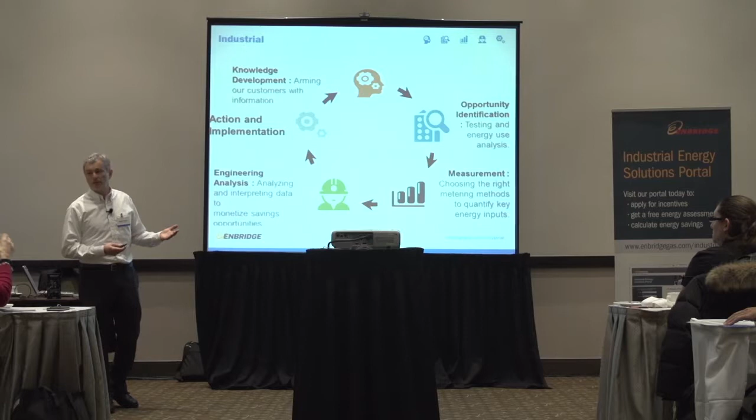So when you go and ask for funding from your facilities for some energy efficiency measure, we are sure that we gave you all the information to be as accurate and realistic as possible. Because we all know that if you go and ask for $100,000 and you tell somebody they're going to get back $100,000, getting back $99,000 is not good enough. Right? So we're trying to really cover you for that.

We speak from experience as well. Again, we saved huge amounts of energy so far for our customers. 110 million cubic meters of natural gas, 20 million kilowatt hours of electricity, 800,000 cubic meters of water in a 3-year period alone. So this is a significant amount of energy. And of course, for the customers, you get not only cost reduction, you get reduced CO2 emissions, and you improve your bottom line. So we feel that this program is a win-win for everybody.

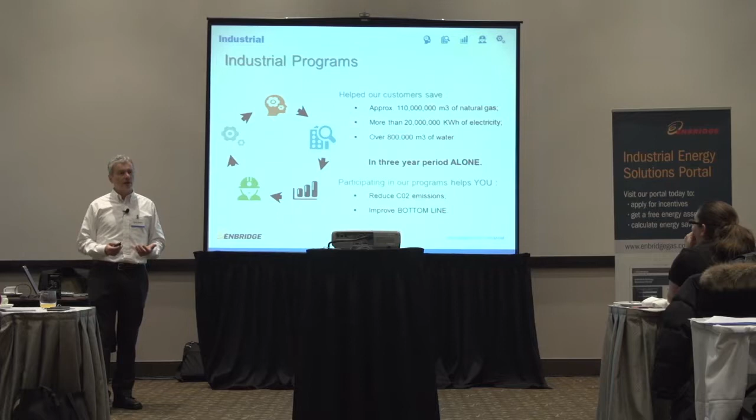Okay, so after this brief commercial, question: why manage energy in the first place? It's all nice to have energy management, but why would you do that? What are the benefits, right? So everybody thinks the benefit of energy management is directly energy benefits. Lower energy consumption, reduced emissions. Knowing when energy is used helps you. If you do contracting for energy, you know how much you have to buy. Your profile of usage helps you get better pricing.

You can make better capital investment decisions. Do you really need a new oven, or can you do with the oven that you have? Do you need a new boiler? And of course, accurately allocate costs. I had a couple of customers who are selling the energy to each other. Accurately accounting for that cost is crucial. So those are all benefits of managing energy that are energy specific. Right? But there are also non-energy benefits that very few people connect.

So operational improvements, set points. Many people have heat exchangers, huge heat exchangers. I had a customer who had a heat exchanger, and when it went down, it cost them $250,000 to clean it. So they wanted to be absolutely sure that that cleaning is necessary at that time. Not before, not after. So getting energy management in place that actually told them how much energy is being recovered in that heat exchanger solved that problem for them.

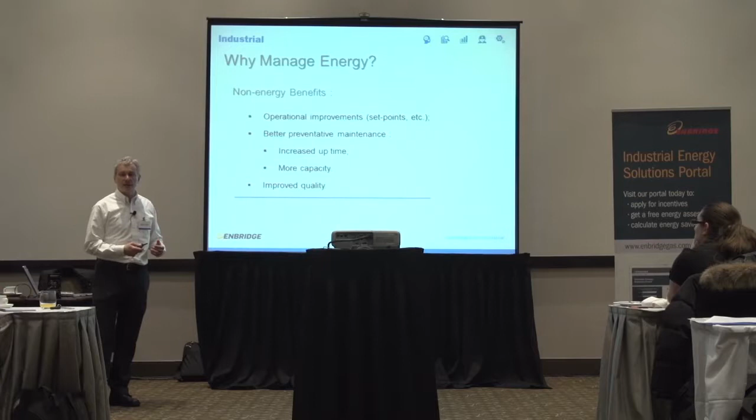Better preventative maintenance, increased uptime, and more capacity. Of course, if you don't have to do unscheduled downtime, you will create more capacity for yourself with the existing capital equipment. Of course, improved quality as a result of better uptime, more capacity. You have more time to focus on the things that matter. It will result in the improved quality.

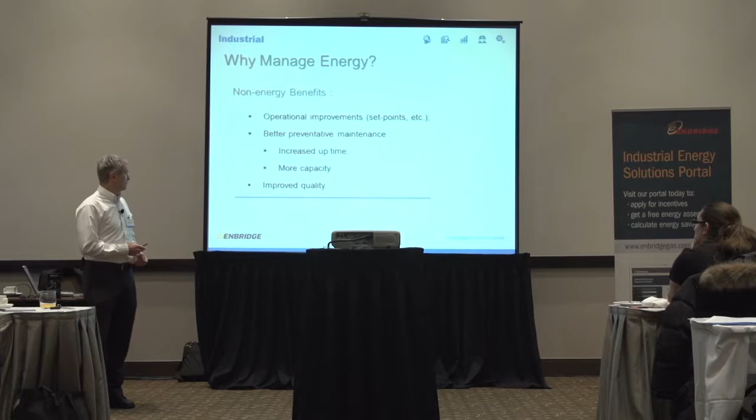Again, result of the energy management. All of it leading to tighter cost control. Because we understand that even though we talk energy, you guys are measured on your costs, on the quality and cost of your output. So all of that actually serves tighter cost control.

So if a good energy management conserves energy, reduces emissions, and saves money everywhere in the organization, then the supporting energy management structure, the processes in place, should provide means to control how the energy is consumed. It should be embedded into every aspect of the organization. It makes energy visible. This is a very big topic for us.

I'm very passionate personally about this, making energy visible, because I feel that if somebody sees every day what it costs them to run something, they will actually act on it. Energy is raw material. Energy can be affected. Energy can be managed. It is not a given that you have to pay a certain amount of dollars every single month. You can control that. That's a huge, huge point.

So how do we see this structure? We call it Comprehensive Energy Management Program, and the way we see it is we start with the senior management sponsorship. Again, huge step, because when we talk energy management and we want to put energy management into every aspect of the organization, we need senior management support to actually spread the word to everybody and to hold everybody accountable.

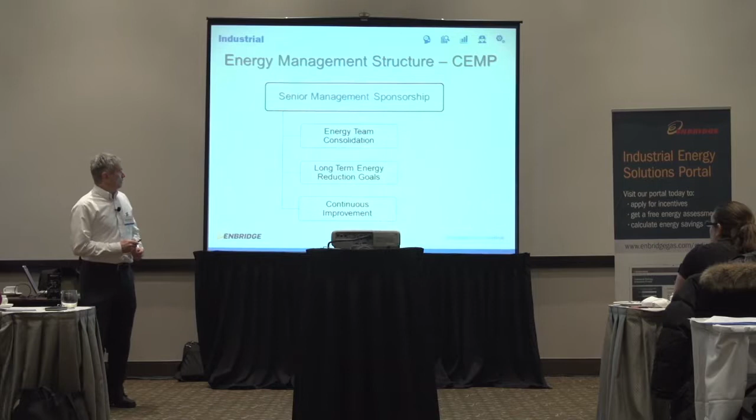So, importance of senior management sponsorship. I went to a few sites myself, and I know my ESCs deal with this all the time, and they say, well, I have great support from my VP of whatever the flavor of the month is. And it's like, I got my support, I can go and implement energy management.

We just had a case, very big customer, VP of engineering, huge, huge fan of energy management. They went about 80% into their energy management process. They had it almost implemented. The guy retired. Guess what happened to the energy management program since? It died. Right?

It's not only good enough to have one member of the senior management. You want to have as many as possible, because that will ensure sustainability. When that one person leaves or gets focus changed or whatever it is, you will have somebody else to back it. So this cannot be a pet project. This cannot be a project where just one guy or lady does it because they're just interested in energy management. This has to be embedded into the culture of the organization. And I know that's a huge task.

That's a given. So the reason why is because when the senior management gets together for their meetings and they talk about their kids and their hockey tournaments and all that stuff, they also touch on other subjects, such as corporate financials, corporate strategy, and the risks to the corporation. These are guys that are very busy. These are boardrooms that are full of ideas how to accomplish those three main goals.

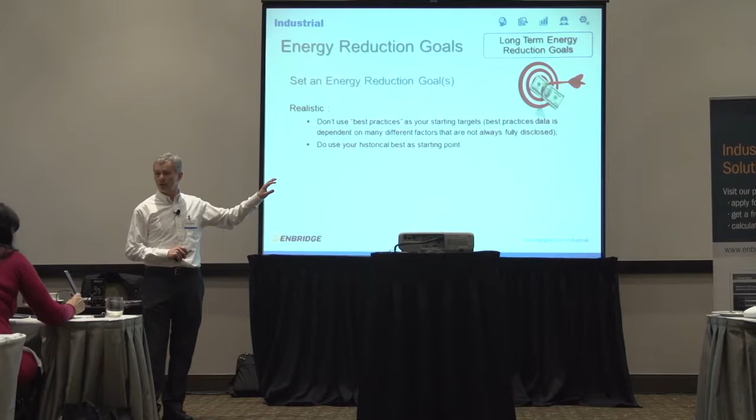So you want to know how those guys achieved best practices before you set best practices as your goal. So you can have it as an aspirational goal, but you cannot have it as your operational tactical goal day in, day out for the operations.

And they have to be time-bound. Again, yes, we want to reduce it by 10 gigajoules, but whether we want to reduce it by 10 gigajoules by the end of 2020, by the end of 2050, or by the end of this year, it's important. How much effort is going to go into it? Depends on how fast and how much you want to reduce.

Any questions or comments on this part so far? Excellent.

Next step, assessing the baseline. We talked about it as an energy audit part. What is our baseline, right? So somebody smarter than me said this, every journey starts with a single step, and it's very true. You have to start somewhere. No matter how complex your project, recall any one of your complex projects you participated in. You might have had 300 different steps on your MS Project chart, but it had to start at the beginning, at the first milestone. Same with this. You have to start somewhere.

So successful energy management implementations have always started with a fact-finding mission to define what is our base case, what is our as-is today case. Because if I would tell you, I want you to reduce something by 10 gigajoules, I have to know that you're already using about 90 gigajoules. Because if you're using 1 gigajoule, you will have a hell of a time getting 10 gigajoules out of the system. You need to understand where you're at.

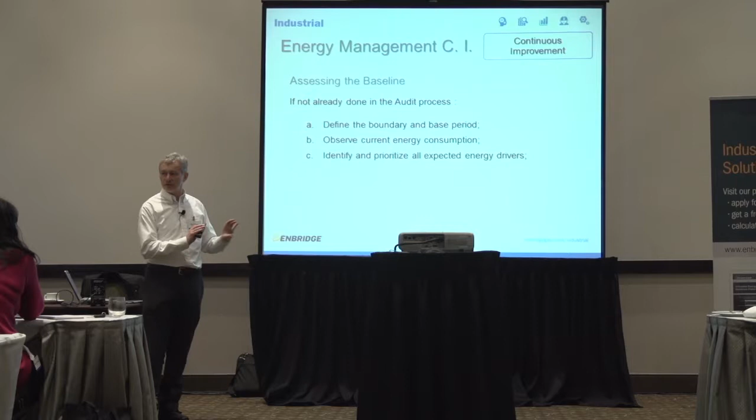So if you haven't had the facility audit process, now you have to do these steps again. Define the boundary. What are you going to use as your boundary? What are you going to use as your base period? Observe the current energy consumption and identify energy drivers. So whether you do it in a facility energy audit step or here, it's irrelevant, but it has to be done. In addition to that, when you're doing the baseline, now there's 2 extra steps. You have to now check if those expected energy drivers actually affect the energy. So you have to generate the baseline energy model, and then you have to check whether that model makes sense.

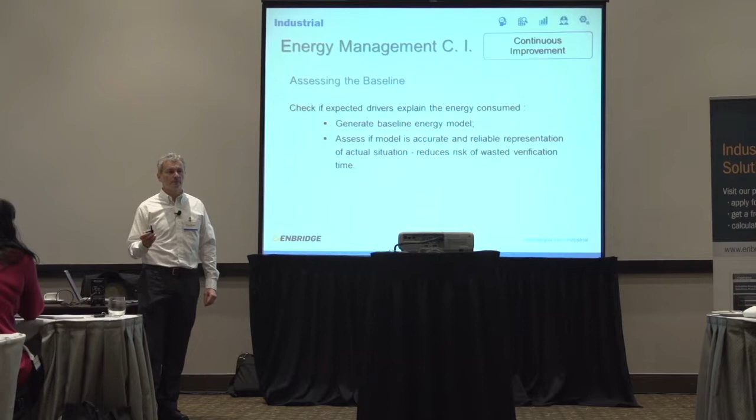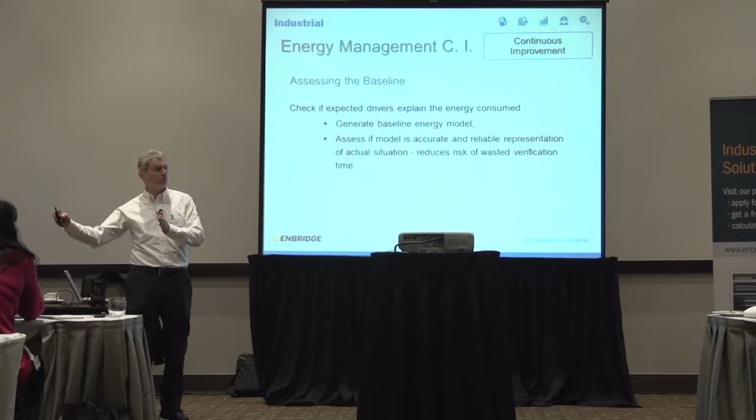And why is that? Because to develop a baseline, it takes a certain amount of time. Right? So you have to go either back into history to get the time, or you have to start now and wait 6 months until the baseline is done. At the end of that process, regardless how you look at it, you will use your baseline on a go-forward basis. So you don't want to be 6 months ahead and say, ooh, now these numbers don't make any sense anymore because I forgot something. So that's a very important step.

Accurate baseline is required. So this is where our ESCs, if you need some help, we're happy to help you. To be there to say, do these numbers make sense? Why do they make sense? Why do they not make sense? Again, free help.

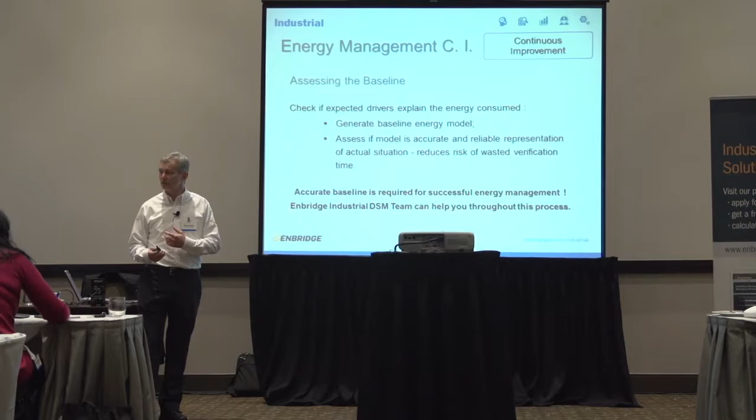So let's start with the defining of the boundary. First step, what are we going to do? Whole facility. If we have a relatively simple facility, then we can use a whole facility as our first step. You have meter data at the entrance of your facility, be it natural gas, electricity, whatever it is, and you have only maximum 1 or 2 energy drivers. So weather-dependent consumption, maybe one simple line that only makes one product in one particular fashion day in, day out. Then you can take whole facility and you won't go much wrong.

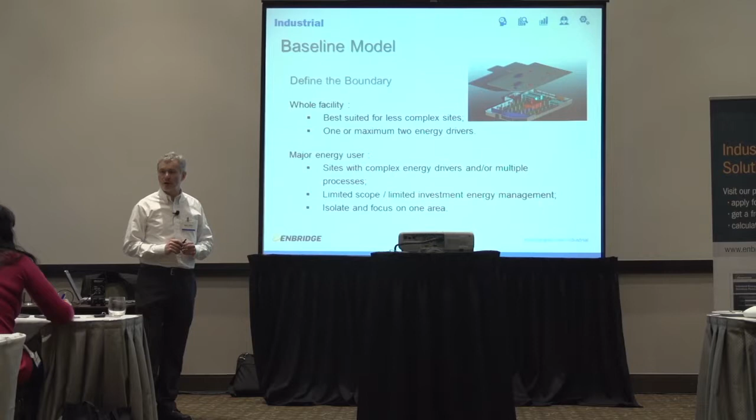But if you have complex sites, if you have multiple energy users all over the place, you want to look at the major energy users first. And then what I call limited scope and limited investment energy management. Start there. Identify something really important, draw a boundary around it, energy manage that part. It can be a boiler room, it can be a major paint line, it can be a major oven, whatever that is, start there.

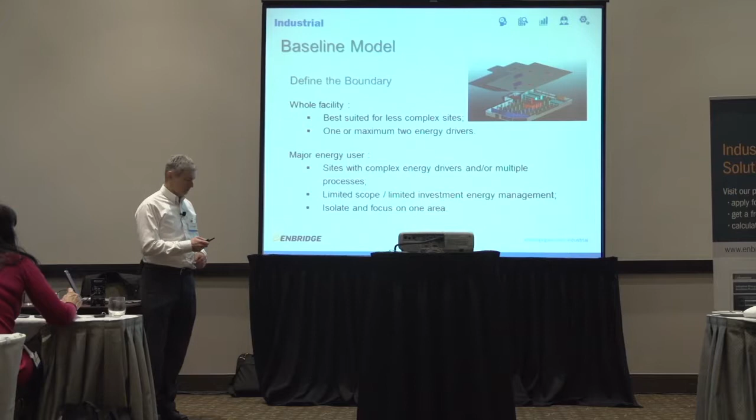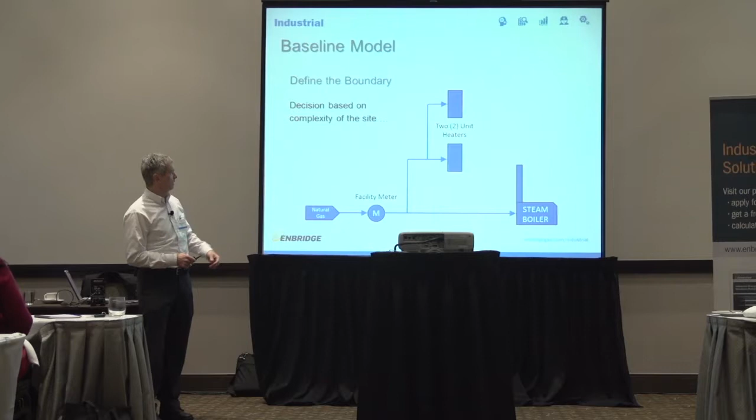So this is just an example, right? If you have a steam boiler that uses 90% of your consumption and you have little 2-unit heaters, you have a facility meter, you can probably get away with doing the energy analysis based on this meter, and you don't need a heck of a lot of other stuff. So that's a facility-wide candidate.

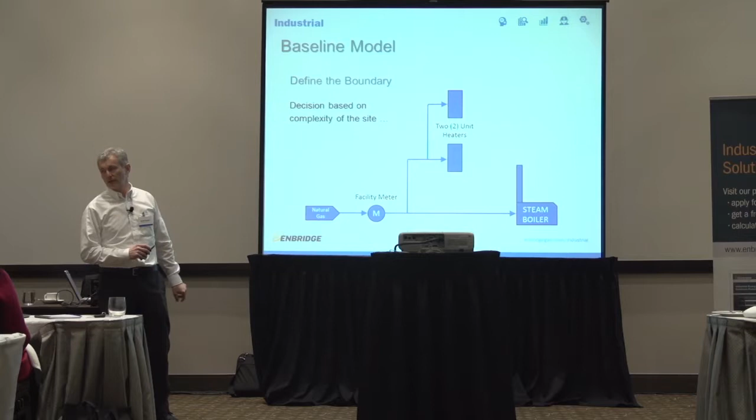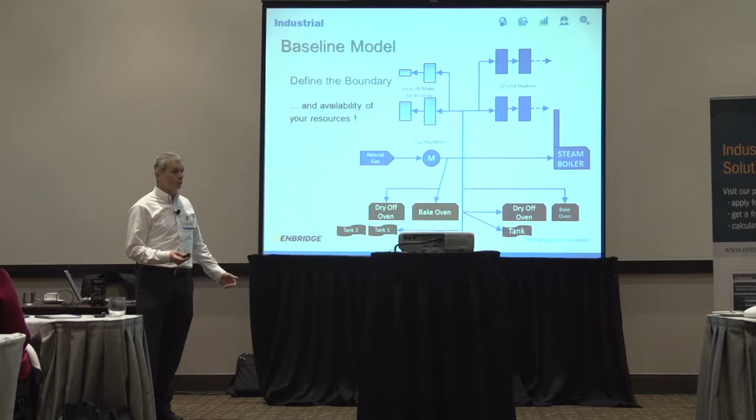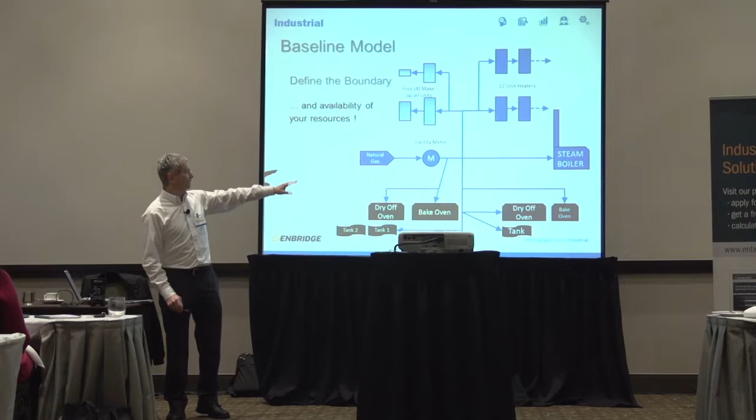But now if you have 22-unit heaters, 4 different size makeup air units, 2 paint lines that are completely different and they operate differently, now it's your decision. Do you have enough resources to handle all of that at once? Because regression on this meter will be a hell of a lot more complex than the last one. Or do you want to split it up and focus on, say, this line or the steam boiler or makeup air units to start with?

You have to make that decision early in the process. It will affect how much energy you spend. It will affect the results. I personally like to start small because then I can show some gains. Management starts to believe in our results, and then we can go on to more serious things.

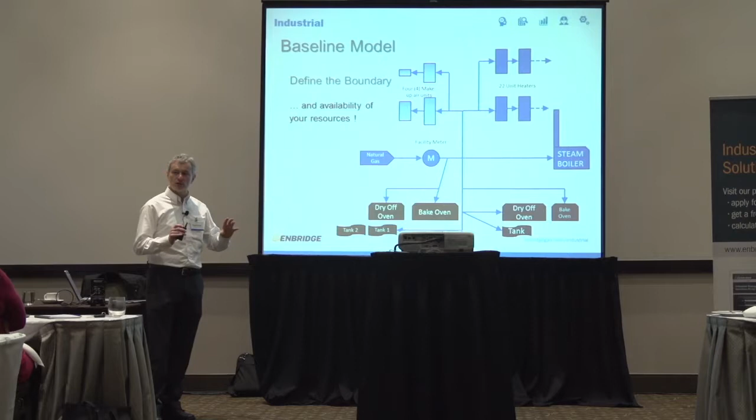But it's your decision to make. We will support you any which way you go. Once you define that boundary, now you have to go into base period. And I keep going about the base period. Why is it important? It can be weeks or months.

If your energy analysis shows that you're using pretty much the same amount of energy day in, day out, and your production levels are pretty much the same, you can probably do like 6 weeks worth of analysis and you will define your energy base case. You're good to go. But if your load is largely seasonal, then you will probably want to look at least 1 year worth of data to see the impact of the changes.

Because you want to go through the base period that encompasses the entire range of your energy drivers, maximums and minimums. For statistical analysis to be valid, you have to work with the data that encompasses the entire range. You cannot say, I'm going to only work from 10 degrees to 15 degrees Celsius for my base case, and I'm going to analyze minus 20 degrees Celsius weather. That has serious statistical implications. So you want to make sure that your energy driver encompasses a full range of extremes.

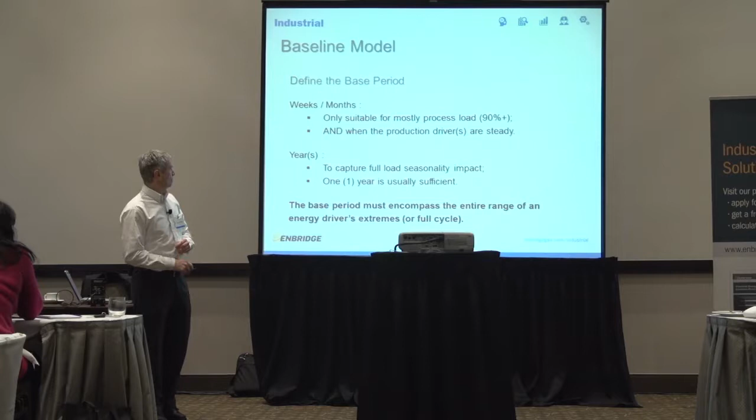Regardless how you get there, this point of data collection interval I cannot stress enough. Have all data sources report at the same interval. Most of you will say, who would do it differently? Again, speaking from experience, one customer had implemented a very expensive energy management system that reported the kilowatt hours in every 15-minute intervals. Of course, not in the full 15 minutes. It was something like 8 or 9 and then 15 minutes further and so forth.

Natural gas was reported at 8:05 and then every 15 minutes. Their production was reported in the shifts. It took us months of work to actually get data cleaned up enough to be useful. So don't do that. Get them at the same interval. And considering that you usually work in some sort of constrained space, what data you have available, monthly data is acceptable, but it's the minimum acceptable interval.

The closer the data, the more often the data collection happens, the better off you are. The more statistically valid the analysis becomes. Coarser data collection, of course, requires a longer baseline. So if all you have is monthly data, you will need a longer baseline. You cannot do statistical analysis on a sample of 3.

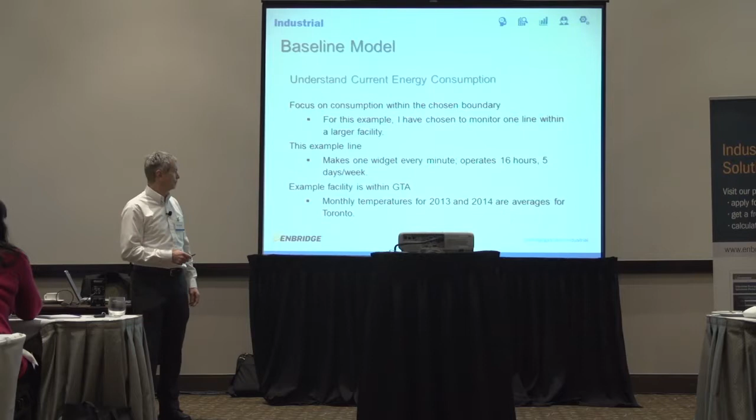But it's not very significant. You're still stuck with about 180,000 cubic meters per month of usage regardless of the weather. So that's typically your base load, your process load. And you can tell that the production is fairly flat because you make one widget every minute, 16 hours a day. There's not a heck of a lot of changes.

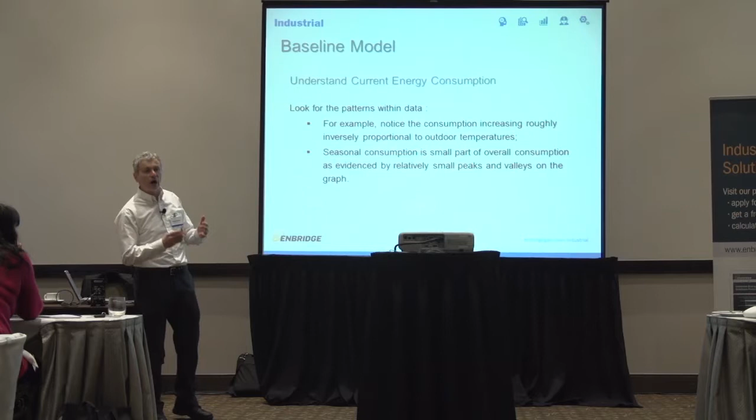And if I'm going to focus on anything in this energy management process, I'm going to focus on my process load. Because yes, I can save some on the seasonal load, but it's not going to be significant. So I'm going to focus on the process load. So that's how you should look at the data. Right? And then we have just a summary of that, how you look at the data. Look whether you have seasonality, how much base load you have, do you have the production steady or does the production change? All of that plays an effect.

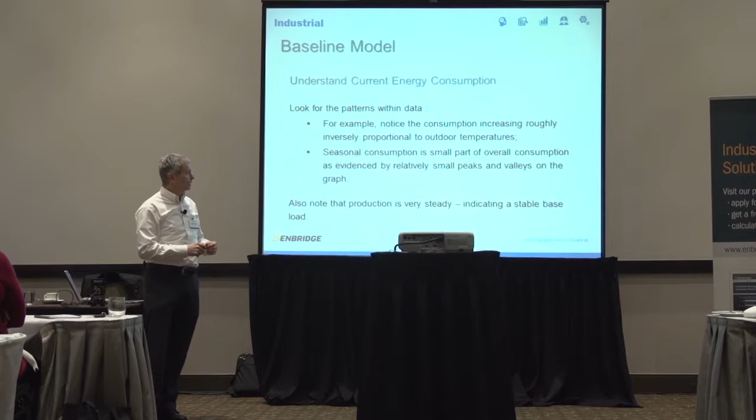Second, so now that we know what our energy looks like, we understand what influences it roughly, let's really identify these energy drivers. So we already have the two. Outdoor weather, we said, it changes a little bit. Production load changes it significantly. So what are the other ones? Now it's time to go back to the Kaizen principles. For those of you who have been part of it and in manufacturing, walk the process.

Go down on the shop floor and say, on this process, for this particular line, I'm going to walk down there, I'm going to talk to the process operators, I'm going to talk to the engineers who designed the process. I'm going to say, what affects this process's energy consumption? What is it that the person on the shop floor actually changes? And when they change that, how does that reflect in our energy consumption? That's how you find the energy drivers.

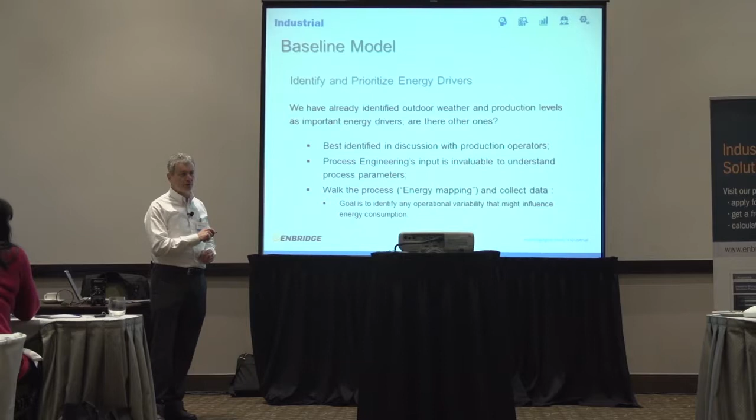Some people refer to energy mapping. There's gazillions of different names for this. But you essentially walk the process and collect the data on how the energy is being used and controlled. Goal of it, identify any and all operation variability that affects the energy use. Any and all of it.

So we have the data, we have the consumption, now we know what the energy drivers are, now we have to connect the two. We have to say, these are the energy drivers, this is the energy, how are they connected? And we use a mathematical model for that. So essentially we take weather, production, any other drivers that we found, we put it in the big black box, out comes predicted energy consumption, everybody's happy forever and ever. That's the basic steps.

In this particular case, we use something called a regression model. Most of you are familiar with it. But it answers the basic question, what's the relationship between the variables? And the way it does that, it relates one numerical dependent variable, which is usually called the Y variable, or what it is that we're trying to predict, and one or more numerical or categorical independent variables. Those are usually X variables. And those are the ones that we say explain or influence our Y variable.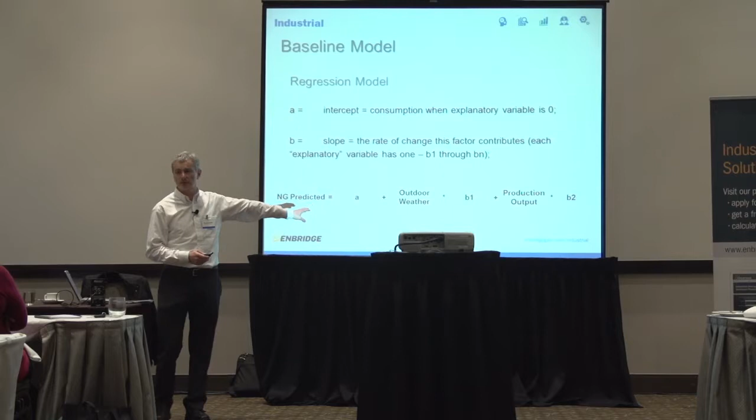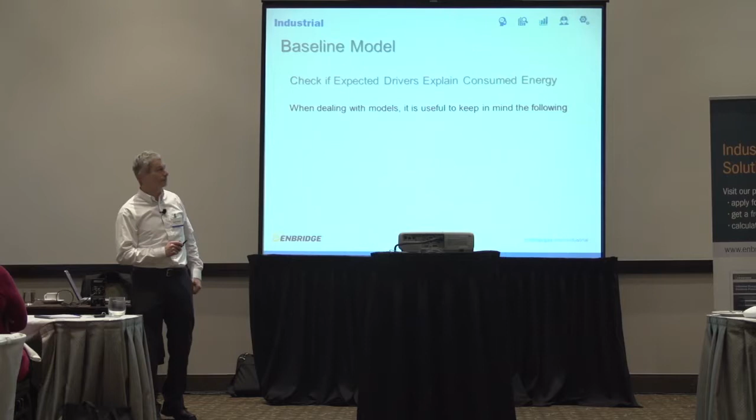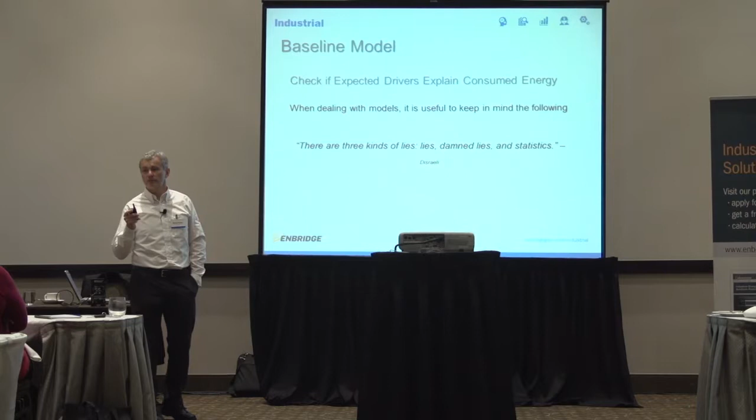But before we actually use the model, we have to remember some basic things about the models. Again, somebody smarter than me said this. Don't always trust the statistics without actually using a sanity check, because you will be wrong. Statistics is no better than the computer program. Garbage in, garbage out. Quality information in, pretty good information out. So we have to be very careful of that. There is no substitute for common sense. There is no mathematical formula that will save us from using our common sense.

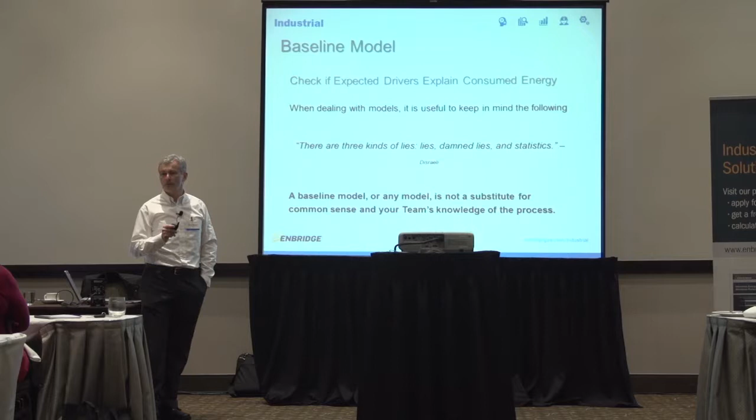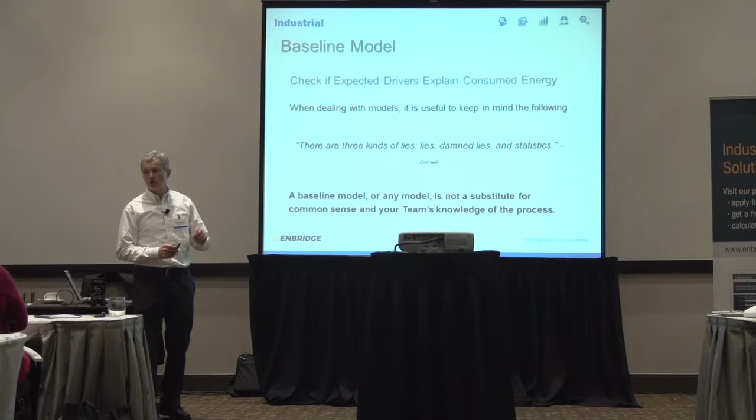So when you get a formula out of any sort of system you use, look at it and say, does that make sense? So if you see, for example, the formula for the outdoor weather, and if your consumption indicates increased consumption with the higher temperatures, chances are your model is not good. Unless you have really good reason why that would happen, the model is not right. So don't trust the model blindly.

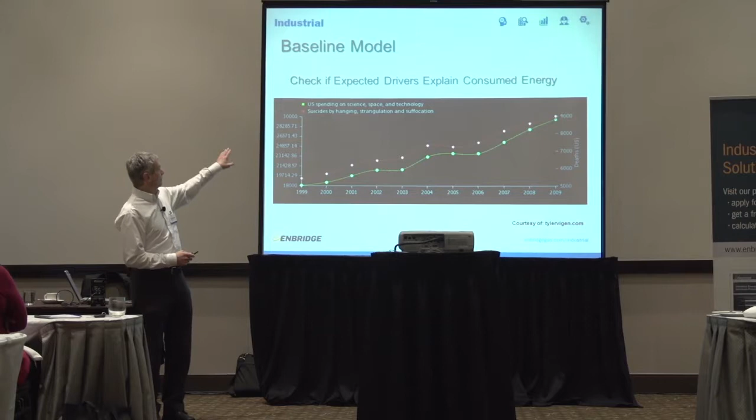I got that from the internet. You can go on tylervigen.com. The guy actually has a bunch of these examples. US spending on science, space, and technology in green versus suicides by hanging, strangulation, and suffocation in red. What do they have in common? Nothing. Correlation is 0.992. Your R squared will be 0.99. It's a perfect model. Meaningless, but perfect. Common sense.

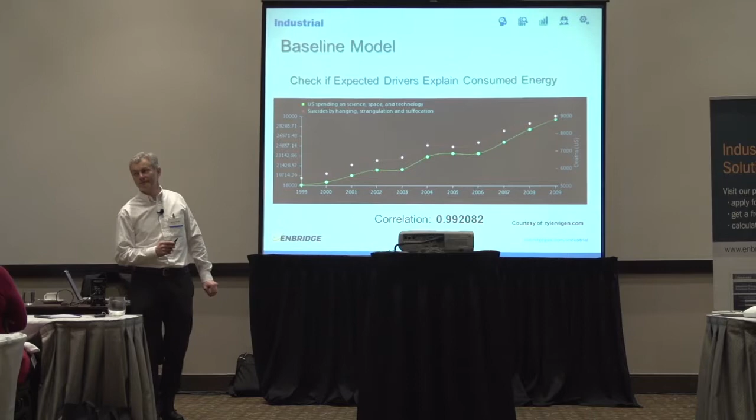So, bad news, good news here, of course. Bad news is you and your team are the only ones, the best judges, to judge if the model is right or wrong. No consultant, no ESC, not any one of us from the outside knows the process as well as you do. So use your knowledge. Check that. We can help you with the model building, we can help you with the data collection, we can help you with lots of things. But you have to look at the model and say, no, that makes no sense at all. And then we go back and redo it.

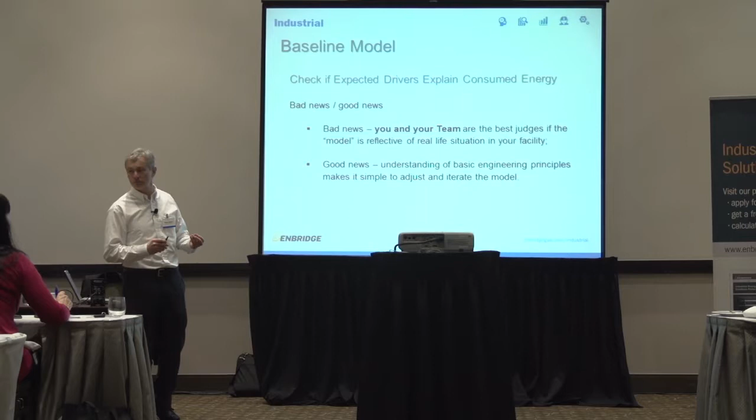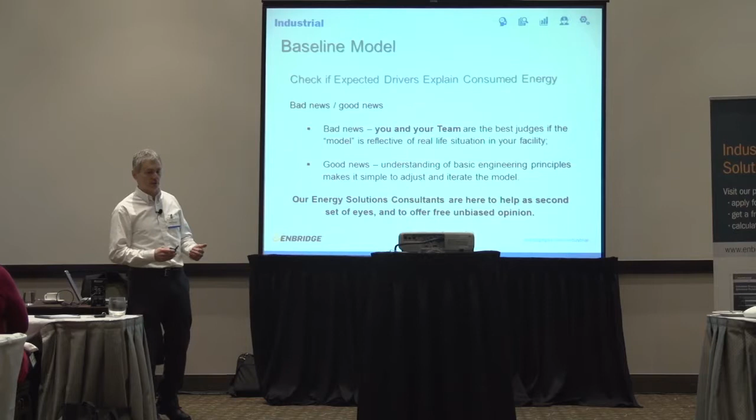Right? Good news is that understanding of these basic engineering principles solves all your problems. It's very simple to adjust and iterate the model once you know that the model could be wrong and once you know what affects it. So it's still within your control. All of you are more than capable to find that. So don't be afraid of the models, but use them to your advantage. We are here as well. If you need a second set of eyes, if you need to bounce ideas off of, if you say, have you ever seen anything like that? We're here to help. Ultimately, it is you who knows your process the best.

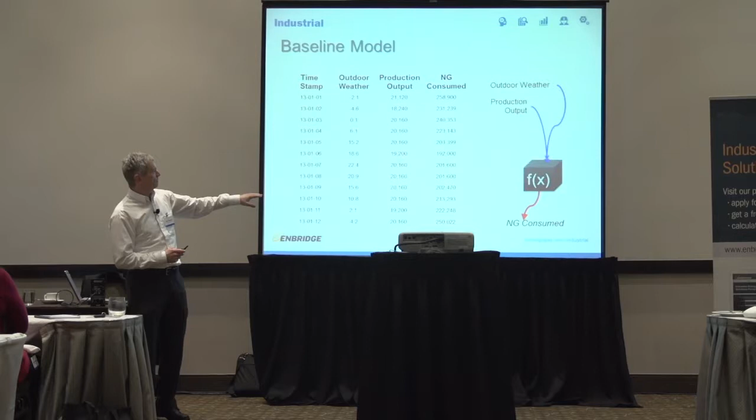So going back to our examples, we put that nice little formula in. We got our linear regression. We have consumed natural gas, and we're going to put it into the model, knowing the limitations of the model. How do we do that? Lots of people think this is some very complex software, very complex science. You can make it complex. There are very nice packages out there on the marketplace, very complex. They range from $10,000 to $270,000 that I worked with, and I'm sure that the range is higher for others. But you can start with as simple as the Excel tool. It's built into your Excel.

It's called the Data Analysis ToolPak. I'm going to quickly show you how it's done, and then George will show you a live demo on the laptop, and Slobodanka there has a laptop as well. So if you feel like you want to ask more questions, we'll have about a 10-minute break after this. You can take a look at the demo, you can ask questions, and then we'll reassemble and go forward, okay?

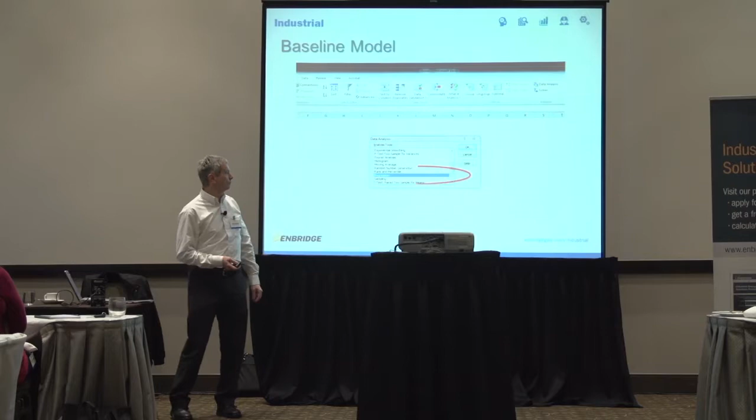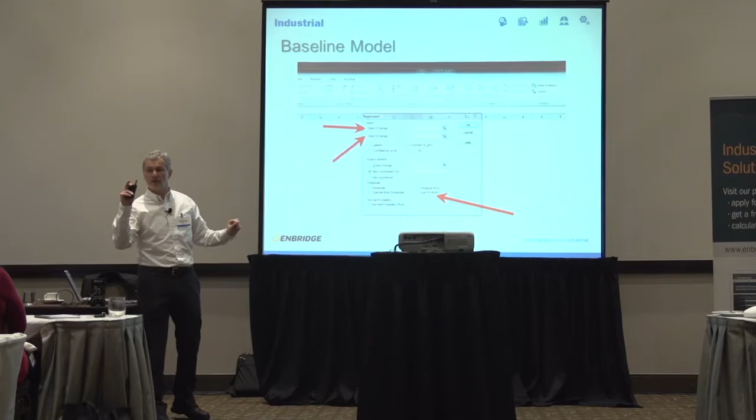So to start with, you find the Data tab on your Excel tool. You press the Data Analysis button over there. There's a pop-up that says Data Analysis. You scroll down, you find the Regression tool, and you click OK. Then this comes up. Input Y range, input X range. Y range is your natural gas consumption. Your X range is all the other variables. You want to make sure you have line fit plots, so it gives you a nice little graph showing you how your regression fits the data. And you press the button. That's it.

For the start, you can use your simple Excel tool. So your energy team, they meet together, they assess all the information they have, they put it into the simple Excel tool, they do a presentation like this for themselves and say, does this make sense or not? That's as simple as the start of your energy management journey.

George, please take over. We'll just switch the laptops here for a second. After this, there will be a 10-minute break.

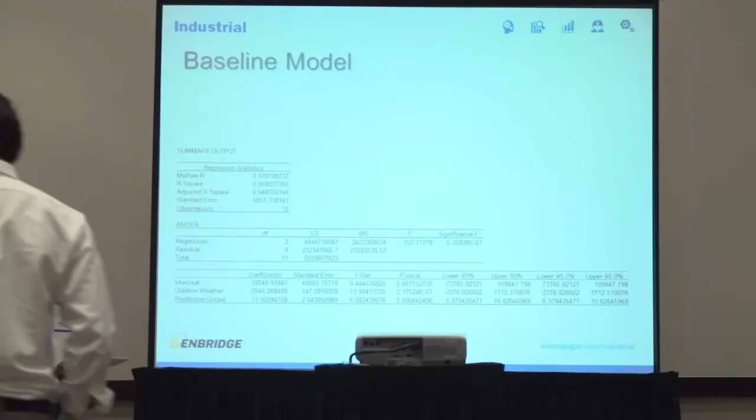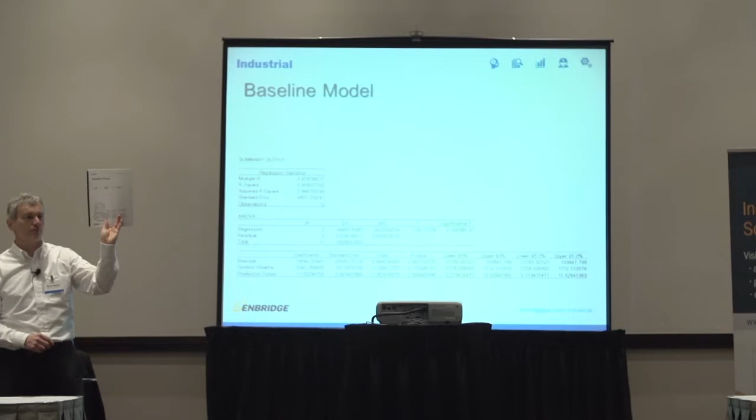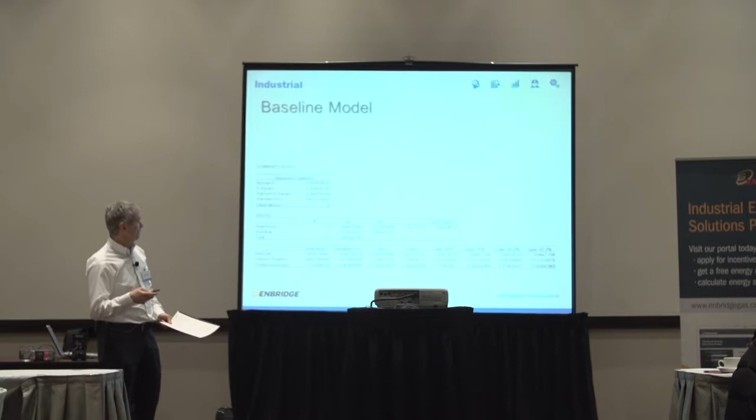So the output of the analysis that George and Sloba did is listed right here. It is also on your workbook example. It's called baseline period. For those who can't read it on the screen, it's a lot of information, but it's right on the baseline period. Underneath the formula, there is an output. So that's what the output looks like when it comes out of Excel. There is nothing to it, but there's quite a bit of information on this output. So we'll go through all of these factors that people have been asking about and try to explain what they actually mean. Any questions are welcomed.

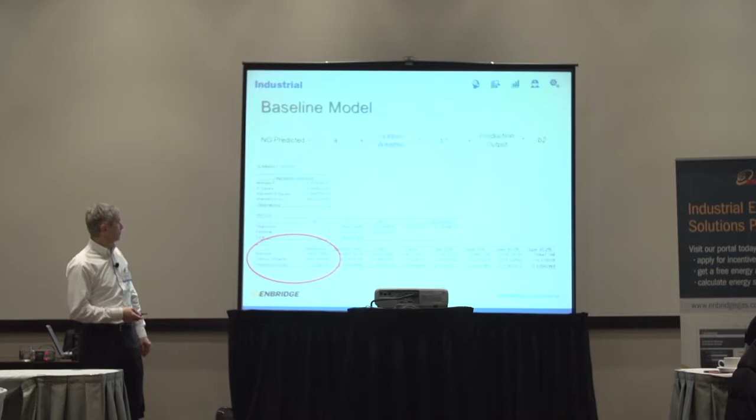So the first thing we're going to look at is what George explained: these coefficients. Those are the actual coefficients that go into our regression formula. We all know what the regression formula is. So we'll make this a little bit bigger. I took these coefficients and put them there. Intercept is 18,000 and something, outdoor weather is minus 2,000 and something, production output is 11. So how are we going to translate that into our actual usable formula from the generic regression formula? This intercept is essentially your A factor. The coefficient is 18,040, so you put into your formula 18,043 instead of the coefficient.

B1 is the factor that affects the outdoor weather. It says outdoor weather, the coefficient is minus 2,000. You put it into the formula as a multiplier for your outdoor temperature. And the leftover is B2, which is production output. Coefficient is 11, and you put it into the formula next to the production. So that's how you arrive at the generic regression formula you can now use.

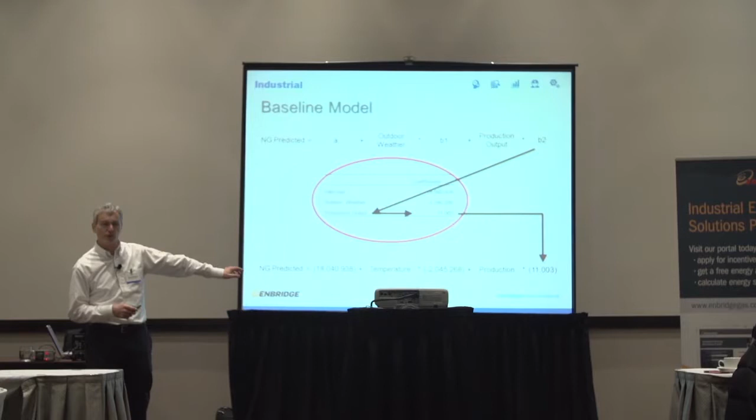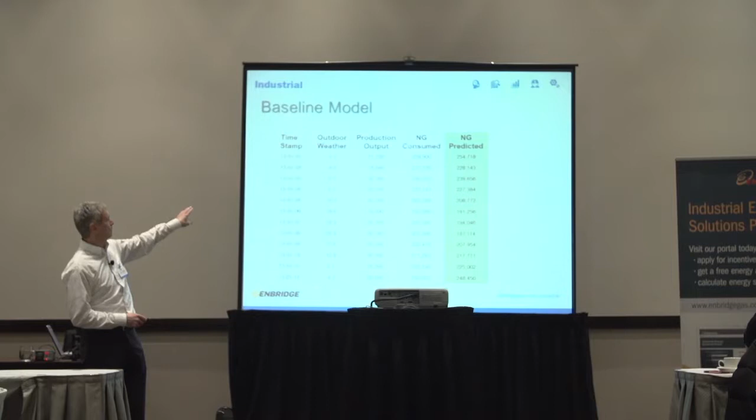So what are we going to do with that now? We're going to take the formula and put outdoor weather and production output in the formula above for each month. Once we do that and calculate the predicted value, we get the column with the predicted natural gas usage. Each one of the values is calculated using the regression formula for its particular outdoor weather and production output for that month or time period.

Yes? The temperatures there would be, as I asked, from Environment Canada? Correct, for the month, if you're doing the monthly. Nothing to do with degree days at all? This has nothing to do with degree days. The reason I don't use degree days personally is because degree days come from the residential sector. Degree days usually refer to temperatures below 18 degrees Celsius, usually, not always.

And I don't know how many of you in the facility actually get to 18 degrees Celsius in your heating. Your setting might be 21 degrees Celsius, but your internal heat gain from all your equipment actually turns off your heaters probably somewhere around 12 degrees Celsius, maybe lower. I know facilities where they go down to 7 degrees Celsius and have enough internal heat gain. So if you use 18 degrees for heating degree days, you will build some error into your formula. That's why I don't use it personally. Same with the cooling degree days. Did that answer your question?

So everybody's now, oh, this is easy, I thought this was complex. I don't understand what the big deal is. Is it correct, though? That reminds me of a joke we used to have in production in my old days: the guy is paid a little bit of money for the knowledge, but a lot of money for knowing exactly where that knowledge is applied. This is the same thing. Anybody can do the mechanics of it, but is this model now working for us? How do we know that?

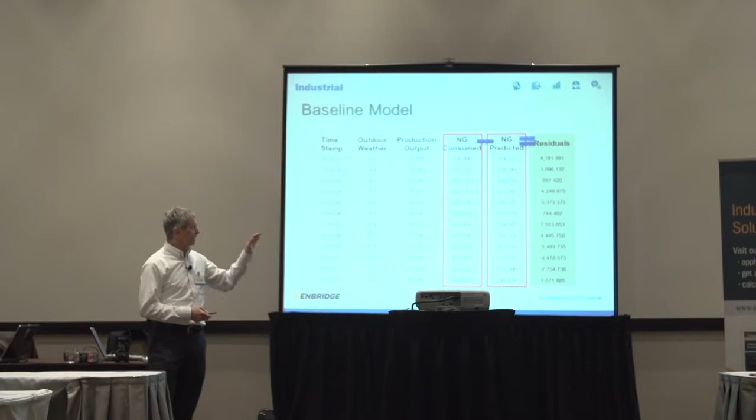First thing to check is, what do our residuals look like? George has made a point to talk about them already, but we'll go over them again because they're important. Residuals are essentially the actual gas consumed in that period minus the predicted gas for that period. It's a fancy statistical word for leftovers. You get random values that are only useful once you put them into some sort of graph.

The graph for our particular values looks this way. On the x-axis is predicted value. On the y-axis is the residual amount. What you want to see is residuals tight and uniform in number around the zero line. What that tells you is that your residuals, essentially the model's guesses versus your actual consumption, are equally distributed on the plus side as on the negative side.

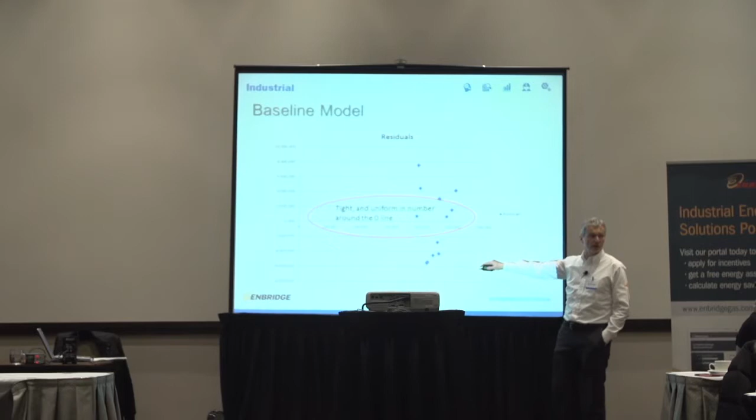If all the residuals are hanging on the top, your model is constantly under-predicting. If they're on the negative side, it's over-predicting. So something's wrong with your model. It has to be roughly even on both sides and tight around the zero line. That's the best residuals you're going to get. So that's a very quick check to see whether the model makes sense to begin with. Not the only check, though.

The other important parameters are adjusted R-squared, standard error, F-statistics, p-value, and intercept. Let's start with one at a time. Highlighted in green are all those parameters and where you can find them. It's a little odd to read so many numbers on one screen, I apologize, but you can find the areas at least. You have R-squared here, adjusted R-squared, standard error, the coefficients we already talked about, F-statistics, and p-values for each individual factor.

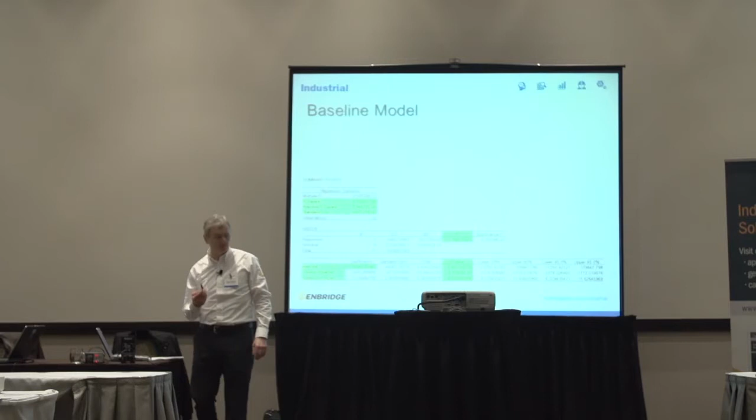These are the actual values from the chart, so you can see what we're talking about. R-squared, 0.958. Adjusted R-squared, 0.949. F-statistics, 122. P-values go from 0.067 down to practically 0. Constant and intercept is 18,043.

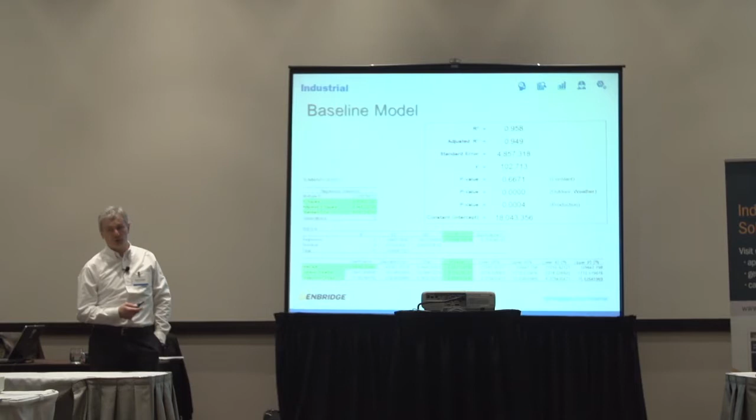So what are these parameters? R-squared is the coefficient of determination. Essentially, it tells you what is the proportion of variation in your natural gas prediction that can be explained by your model. So what are the energy drivers that you put in? How much of that model are they actually explaining? That's what R-squared is telling you.

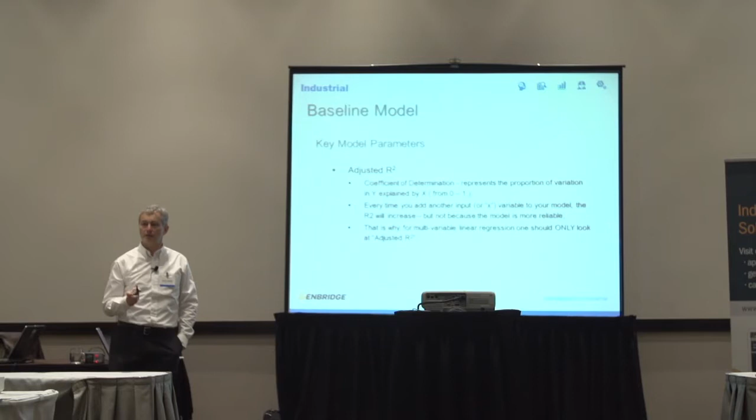Every time you add a variable, your R-squared becomes better and better and better. So if you put 15 variables, your R-squared will be pretty close to 0.9999999. And since you want it to be between 0 and 1, you would think it's a great model. The problem is R-squared itself will always grow. Every time you add a variable, it will grow, even if you add a meaningless variable. That's why you have to look at adjusted R-squared. For multivariable regression, you always want to look at adjusted R-squared.

Standard error essentially tells you, if the standard error is large, that your model is not all that reliable because it's not sure whether it's correct or not. It just gives you a lot of window for errors. So you want standard error to be as tight as possible.

F statistics essentially tells you whether the independent variables taken as a whole do explain the dependent variable. So whether all those 2 or 3 variables that we have explain your predicted gas usage. The higher the number, the better off you are. There is no magic threshold, but the higher the number, the better off you are. So if you do 2 or 3 models and you want to compare them, the higher that F statistic goes, the better off the model you have.

P-value is another important one. It's a confidence level. It essentially tells you what is the probability that I'm wrong when I think that I have a statistically valid model. P-value usually you want to be below or equal to 0.05. And if you look at this as a percentage, it will be 5%. An easy way to remember p-value is if you want your confidence level to be 95%, your p-value has to be 5% or less. If you want a confidence value of 90%, p-value has to be 0.1 or less. So whatever is left over from your confidence to the 100%, expressed in decimals, that's your p-value.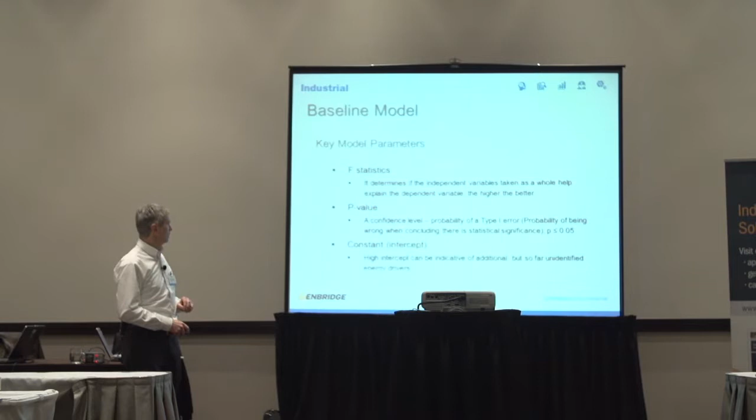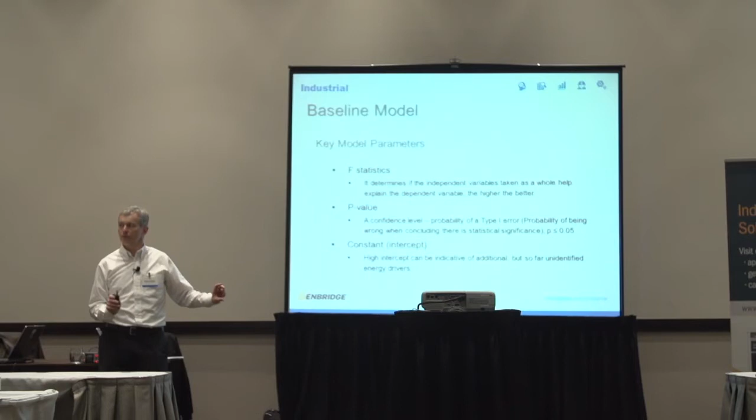Intercept itself. A high intercept relative to your original point can be indicative of something you missed. It means that, let's say in our case 18,000 out of 180,000, 10% of the load is still not explicable by all the variables we put in. The model is saying, this 10%, I'm just going to keep it. It's always there, but I don't know why. So the higher that intercept, the less chance you have that all your energy drivers are accounted for. There could be exceptions to that, but that's a general rule.

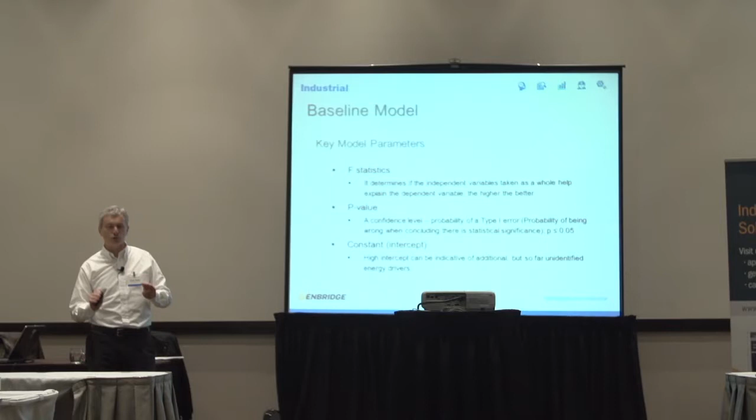So why is it important to get that right? Because once you establish your model, especially if you have these energy management initiatives, energy reduction targets thrown down from corporate, they will use that model to judge you versus the other facilities. So you want to know that you're judged the right way.

Budget might be apportioned based on the results of this. So if your analysis says, I'm going to use 10% less gas next season, somebody in accounting might say, then you need 10% less money to run the facility. Then the next year it will be really hard to explain why you're 10% over the budget. So you want to make sure that the model is correct and that you understand the implications, the sensitivity of the model. What if the model is slightly wrong, which way am I going?

So now, okay, we did the baseline, we have the model, we're happy, but before we call somebody and put a flag up and say, we have a model, we can now predict the future, we know everything, we may want to check it. Which is why I usually recommend collecting data for 2 times your base period. Because you want to have, let's say, 1 year of the base period to build the model, and then you're going to use the 2nd year of historical data to check your model before you tell somebody that you know what the model is and that you know what the future looks like.

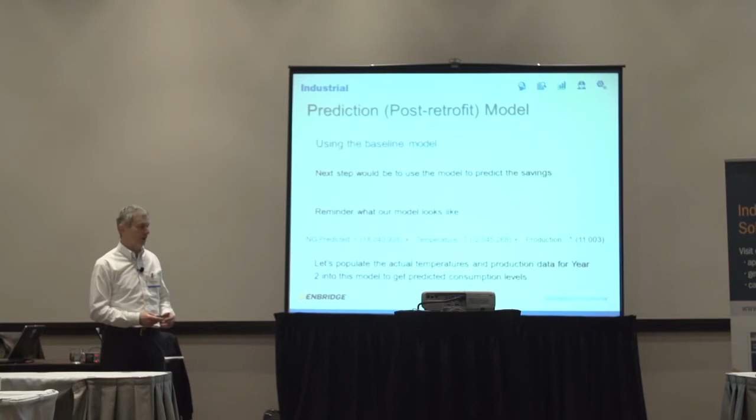So we know that this is the model. We just generated it. So let's populate the temperatures for the next year. Let's say we had another year in our back pocket. So this is the prediction of that model. You'll notice now timestamp is 2014, for example. We have predictions. We're all happy. We know how the model works. How we check it against consumed gas for that year.

So we put consumed gas. Now we total them. Oops. We actually used more energy than we predicted. That's not a good thing. So, is it a model's error, or is it reality? We actually use more gas.

Anything can happen. So if we, our energy team, have the logbook that says we did these steps, we implemented these changes, we all strongly believe we should have used less. I'm sure we used less. And we have not tested this model before. This is the first time we used it. We may want to go back and reevaluate our energy drivers just one more time.

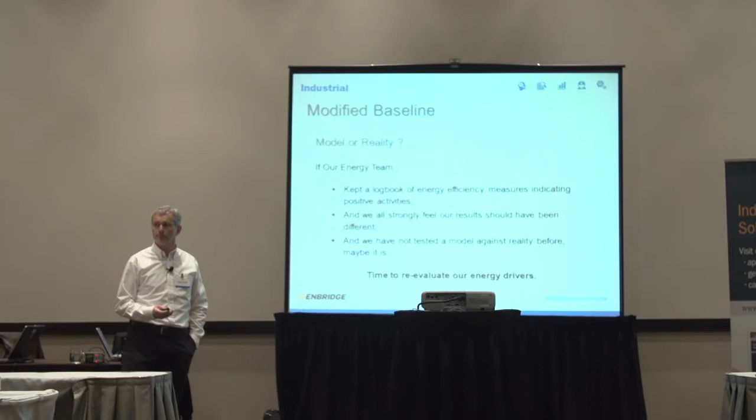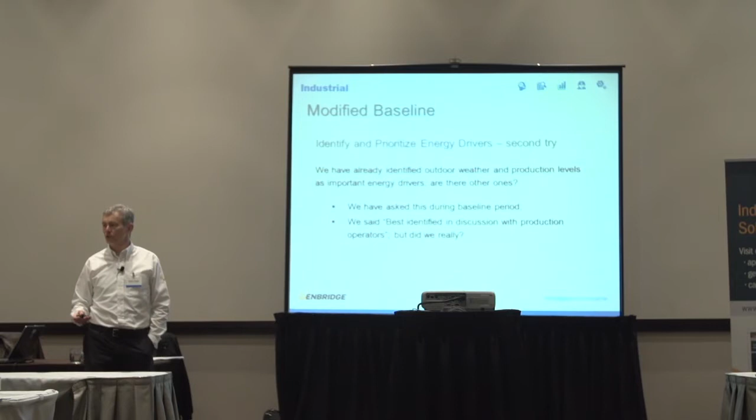So we already know what the energy drivers were. We said outdoor weather, production levels. Those are the energy drivers. We were supposed to go and ask the process owners, is there anything else that can potentially affect your energy? No, we don't have anything. That's how we did.

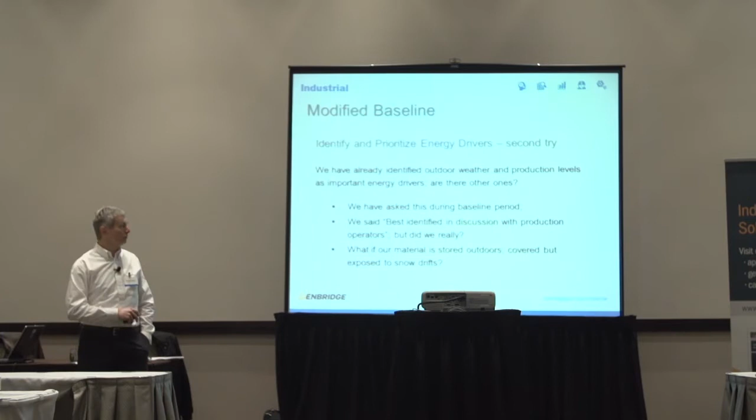What if our material is stored outdoors, covered, exposed to snow drifts, and then we put them in the oven directly? I purposely did this far-fetched example. This is not the real-life example. Because there could be the littlest little detail that we skipped. Now with the snow drifts, I actually can go back and check what the snow drifts were for that year. Go back into my baseline model and check them even for 2013 because I have the data on some site.

But what if that energy driver that we missed was a setting on some machine that we don't keep a log of? You just threw away your whole baseline period, and you have to do baseline again. That's why it's very important to catch energy drivers up front. Even if you have too many of them, it's better than not have enough.

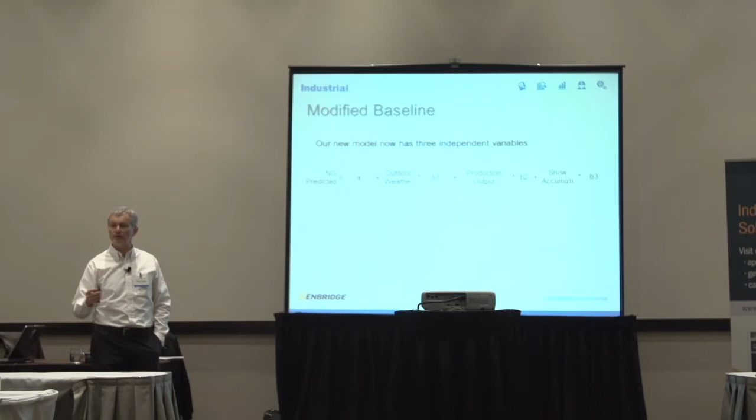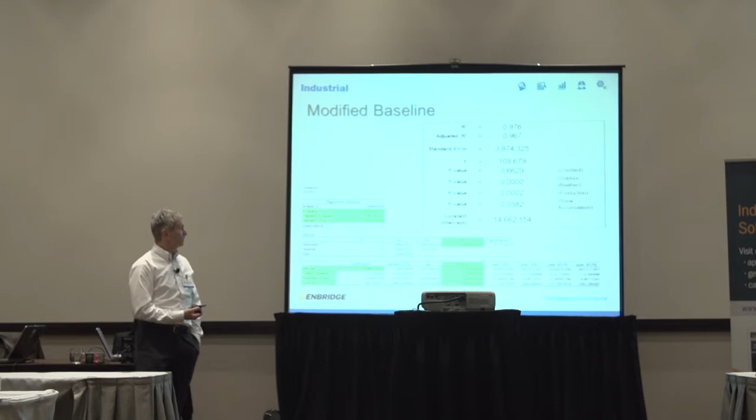So now if we did this whole process again with 3 variables, you will notice that there is a B3 component to it. We follow the same steps. We get the same coefficients, this time modified. Look at our model now. Adjusted R-square 0.967, standard error 3,800. Model still looks good, right?

Let's see. So now predicted for our original baseline, modified now for the snow accumulation for 3 parameters. We have predicted natural gas. For the post-retrofit in the second year, we have consumed gas, natural gas predicted. Much better. Now we have better results. Right? So we're in the right direction.

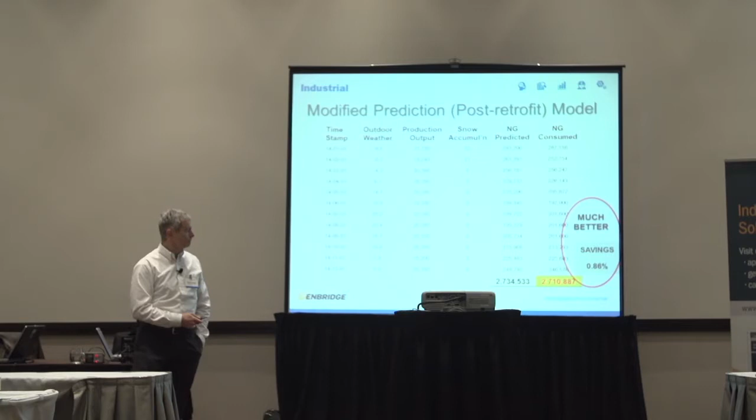Okay, so what did we do wrong? We had a model that had very good parameters. Everybody will tell you 0.95 is an excellent adjusted R-square. There is no reason to doubt your model. So we just jumped in and we said, this is the right model. We never even investigated anything past that. But this turned out to be an important mistake in our example. It turned our facility from the energy saver to the energy overconsumer.

That can have huge implications if you're part of the large corporate chain. What if that result was used to compare us to the other plants? You would look really bad. So we want to make sure that these numbers, these models that you get, are as realistic as possible before we announce them.

This is the second question that we'll get a lot. How do you know with these little adjustments here or there that now you're actually correct? It just happens to be that you're now a saver, so you pick that one. That's a fair question. And if you have to make a mistake on that side anyways for your future. Essentially, all models are wrong. Some are useful. George Box is the famous statistician in England. So he himself would always acknowledge that no model is actually 100% accurate.

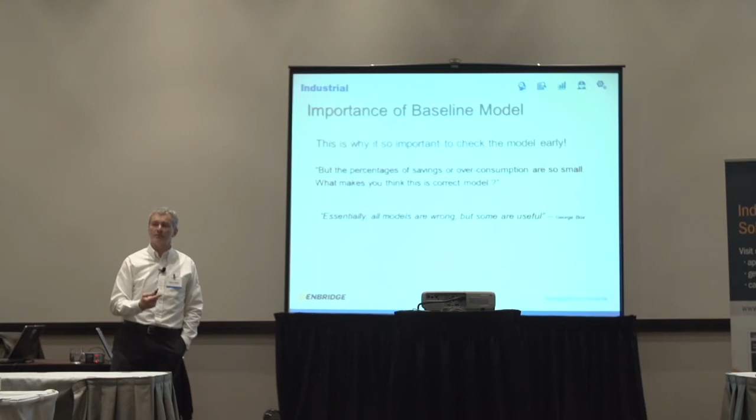So let's compare the 2 models. Let's see where we're at. On the right-hand side is the previous model, baseline. On the left hand is the modified baseline, the new example with 3 parameters. So adjusted R-square, 0.949, went to 0.967. So we went in the right direction. It's actually a significant change. But also our standard error went from 4,800 to 3,800.

Our intercept got better. Seems to be less of the load that we cannot explain by what we use. So no drastic changes, but some improvements. But how do we look at these improvements now? So adjusted R-square improved. Standard error improved by 20% of the original, 4,800 down to 3,800. So it means the model got tighter. It means the model thinks it's now closer to the reality.

Intercept got smaller by almost 25%. So there's far less load that's left unexplainable by the model's parameters. So we moved in the right direction. We went from 18,000, almost 10%, down to 14,000 cubic meters that we cannot explain. So that means that the variable that we added is actually statistically important. There's no other material changes in this. So that leads us to believe that, yeah, this is probably the good model.

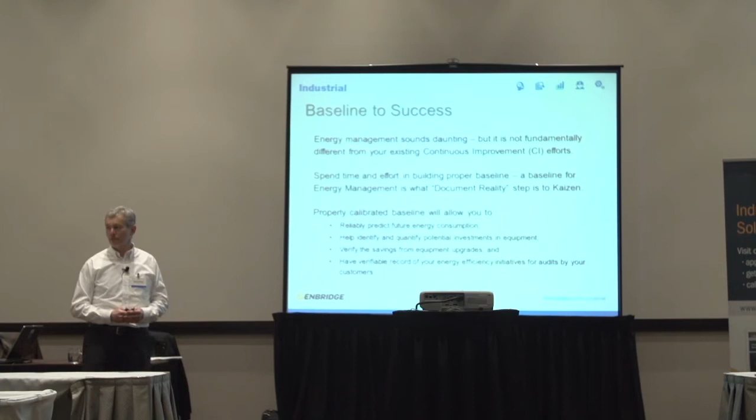And you can have a verifiable record of your energy efficiency initiatives for your vendors, for your customers. Some customers nowadays will ask you, how do I know that you're actually energy efficient? If you have an energy baseline model, you can show the progress. It's statistically valid. It's an acceptable way of showing progress.

So the process itself, again, to set up this energy model is very simple. Define the boundary, define the baseline time frame. Observe the energy use in that boundary and in that time frame. Prioritize what the energy drivers are, check them, build a baseline model, recheck the baseline model again, and then start using it for the future.

This is no different when you look at it than actually managing the energy later on, because you'll follow these same steps. Observe energy use, identify improvements, execute the opportunities, verify the impact, act on it, and go back to observing. So when we had that continuous improvement below the management sponsorship, energy goals, energy team, we had that big box that says continuous improvement. This is what it is.

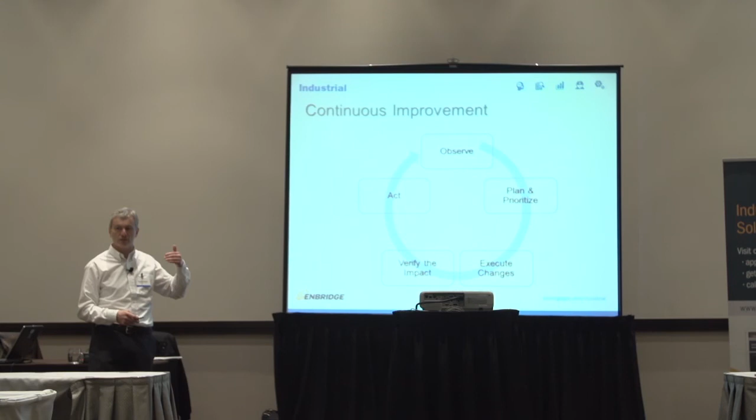Again, no different than your continuous improvement today. If you took your continuous improvement process that you have now for raw materials and you added a line for energy, you would not be far off. You do not need a separate process for this. You can incorporate it. This is your typical continuous improvement. You didn't even notice when the slide changed. All it changed is just a generic description in the boxes. The process, the thought process, the setting up of the process is identical.

One thing that I would like to bring to the forefront for the end of this session is this importance of act. Because we had plan, do, check, act. And lots of people are like, well, do and act, it's sort of like the same thing. It's not. It's really not. Observe. Some people have an OPDCA process rather than a PDCA process. So the first step is observe what your current status is.

Plan. Based on what you observed, what are your objectives for the next little while? Do. Implement those objectives. So keep a logbook of these events so you know what you've done. So when the model is not right, you know at least, well, I think that all these steps should lead to something. So that's an important step to have. You have to have specific actions, specific events. This is no different than events in the Kaizen.

Check. Study those results. So you made a change. Check whether that made the actual change that you were hoping for, whether the reality matches what you expected. And then act. If it is the same, if now there is a better way of running your process, if there is a better way of managing the energy, implement those new standards of performance.

So if you have 3 shifts and shift C consistently is outperforming shifts A and B, find out what shift C does, make it standard operating procedure for all shifts. Without that, you will not have persistence of savings. That's the goal.

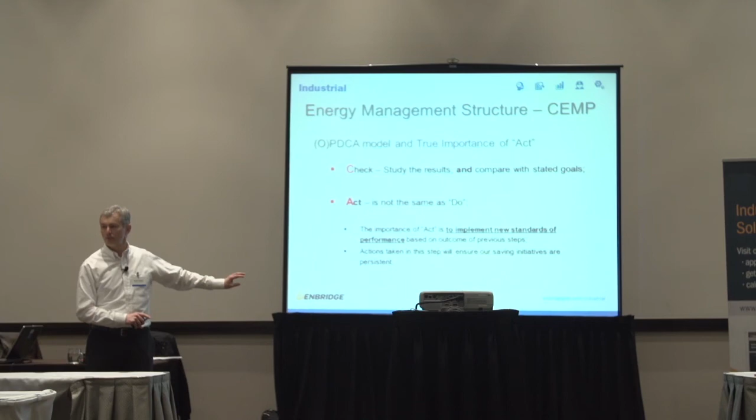And as a further proof of our involvement in this, for 2015, we are actually launching now a brand new program called Comprehensive Energy Management Program, which is available now, where our ESCs will act as your guides throughout the process to help you set up the energy management structure discussed before. And the energy management structure is quite simple. It is listed on the front page of your workbook, and it looks like this. You will see that two graphs combined. That's essentially what it is.

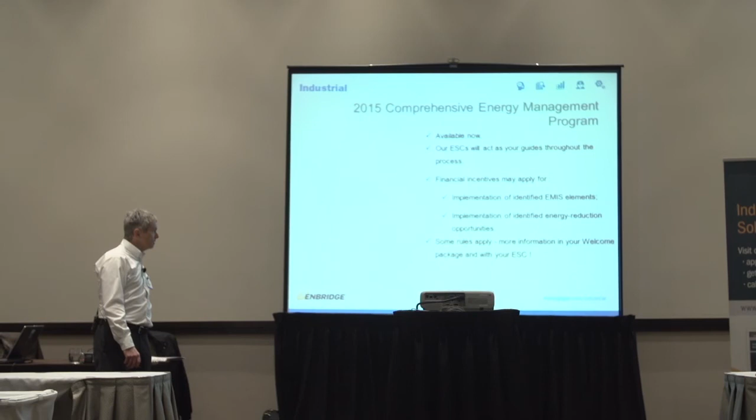So we need senior management sponsorship, energy team consolidation, long-term energy reduction goals, and then to set a cycle of continuous improvement. It's as simple as that. There are, of course, always some rules. Those rules will be explained to you if you're interested in this process by your individual ESC, or you can drop me a line and ask for more information. But this program is available now.

So we will actually not only guide you through the process, we will also give you implementation incentives for buying meters, data collection software, training, those kind of things. We will also help you implement any energy reduction initiatives identified through that program with some additional financial incentives. And we will work, to the best of our abilities, with LDCs, NRCan, and all other partners to enable you to get as much money back as possible.

So whoever is interested, please talk to your ESC or directly email me, and I will be able to answer any questions. But that's now available for your information.